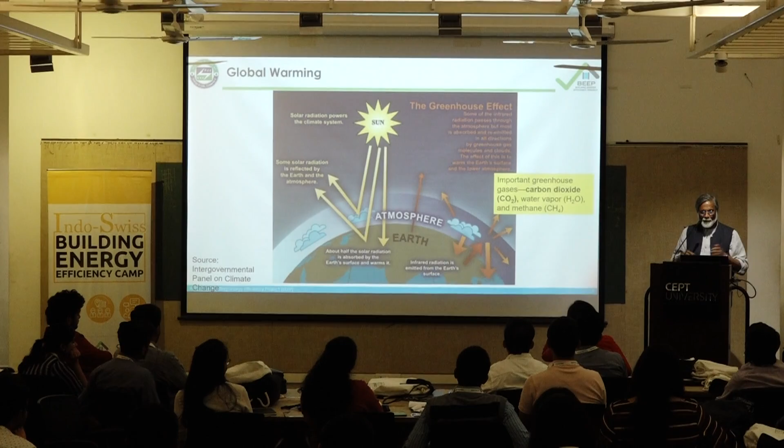Is there anyone here who doesn't know what global warming is? We all know what global warming is, and it's clear enough that it is happening and it's been proven. Is there anyone here who doesn't know what it is being caused by? We all know, right? It has to do with the concentration of carbon dioxide in the atmosphere.

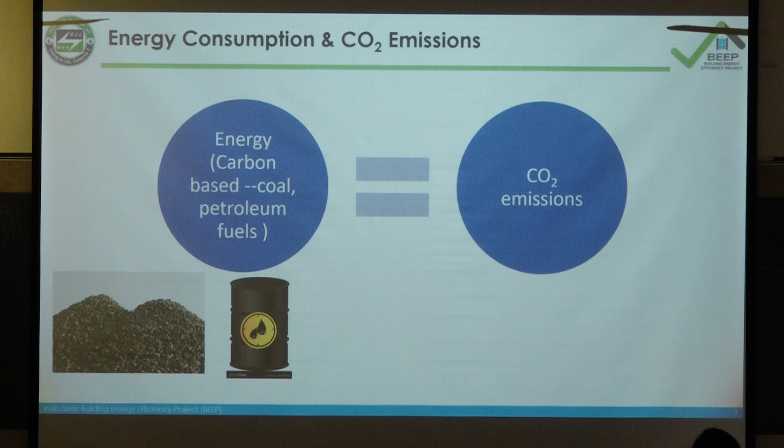Much of that concentration is being caused by carbon-based energy production—coal, petroleum, gas—which releases carbon dioxide, apart from deforestation, which is another cause of carbon dioxide emissions. This is a major thing happening because in our modern day we've become dependent on this carbon-based energy production. We now have to somehow see how we can withdraw from it if we are going to do anything about climate change. That's the big picture.

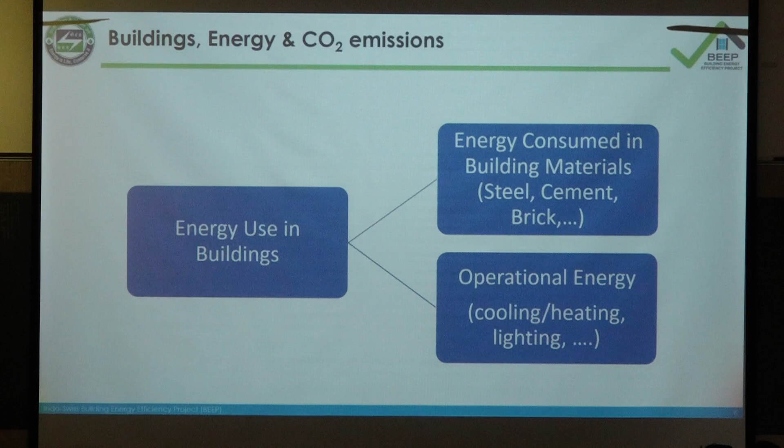And now we know clearly that globally, building operations and production of building materials contribute—what's 28 plus 11, about 39, say 40%—of carbon dioxide emissions, and the responsibility for climate change is directly attributable to buildings. That's why it's so important.

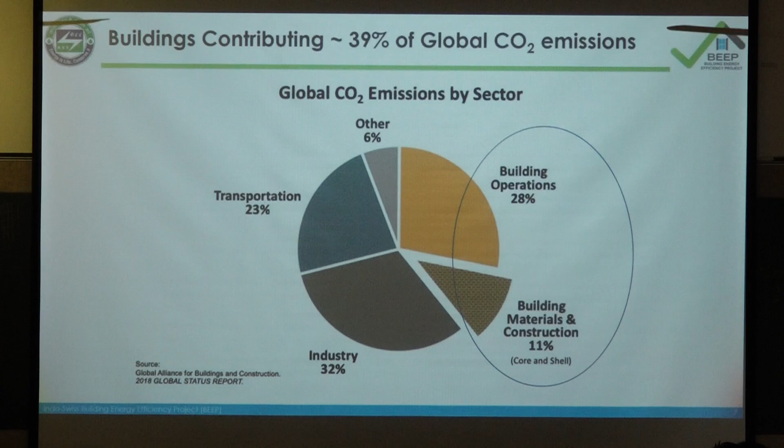And you can see if you add transportation along with cities, etc., the built environment is actually a more complex picture. The way we make cities and live in cities—the buildings and city systems going up and down, managing city space, distributing services, etc.—is going to be responsible for a good 40 to 45% of what's happening.

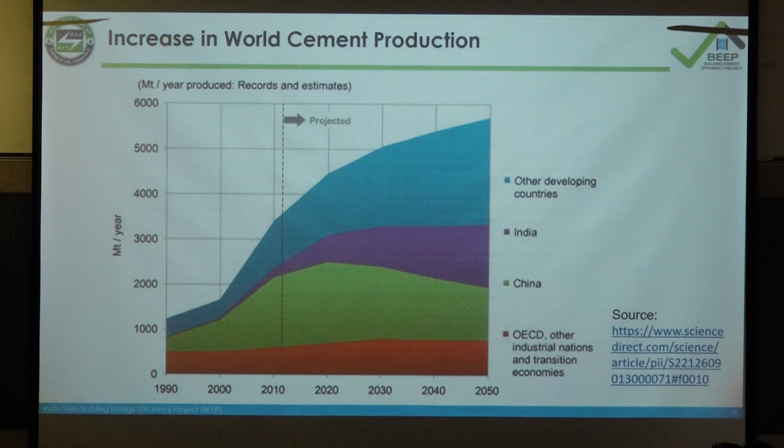But you know, the picture is changing. You go to China, India, Mexico, Nigeria, Brazil—the picture is changing. Societies are developing, populations are growing, and very soon we are going to be the bigger contributors. And that's what we have to watch out for.

And not only that, what's happening is that as we become a little better off, we need more built space per person. As we become better off, I need a restaurant, I need a cinema, I need a college, I need a school, I need this and I need that. So the per capita construction activity also increases.

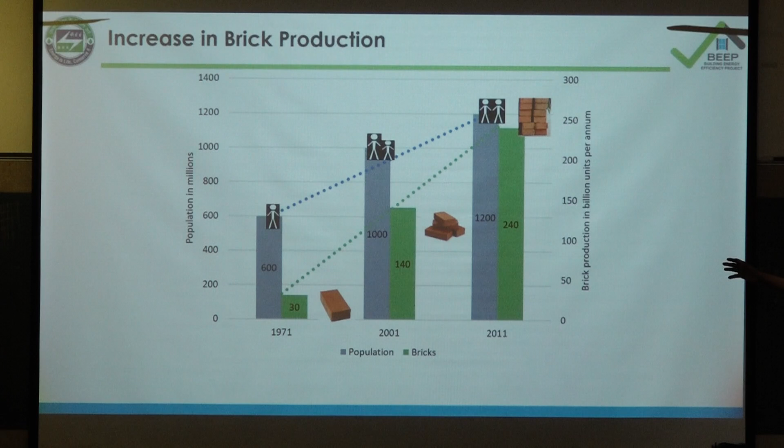And so there's a big increase, not proportionate to population increase. It's population increase multiplied by wealth, leading to much greater building demand, and that has both an impact on operational energy as well as embodied energy.

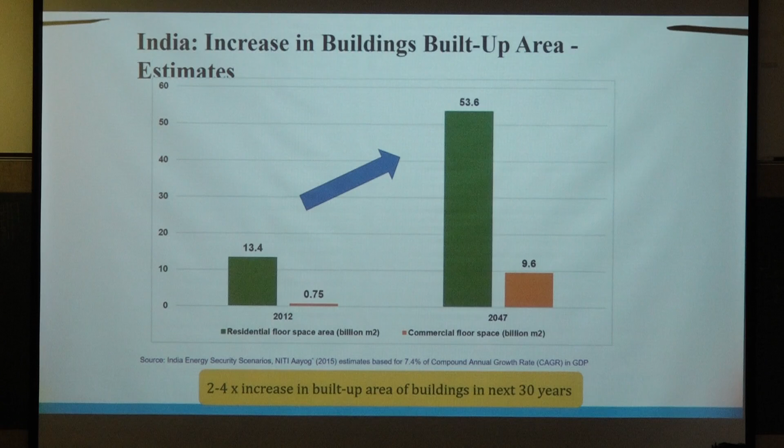Now just imagine another 50% addition of built space in one decade, and the type of building we now build—multi-story, reinforced concrete, steel, glass, plastics, aluminum—the intensity of embodied energy is also increasing per square meter of built space. And that's happening across the country, 63 cities with large populations growing, all in one decade. You know what this is? This is a bomb—a bomb exploding simply on account of increased building activity of a certain kind. That's the story of embodied energy.

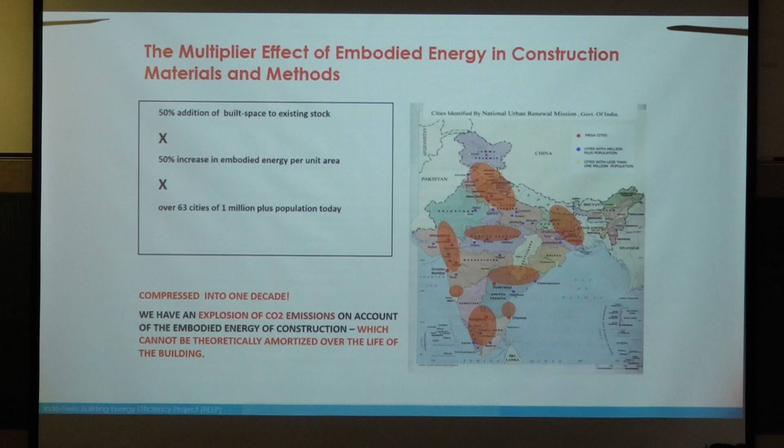And Samir says he's going to pick this subject up briefly, although that's not the core of what we're going to do here, but he's going to pick that subject up.

And here's another piece of information, very important. When you talk of operational energy, there was a time when we thought it's commercial buildings—ECBC. We all know what ECBC is, Energy Conservation Building Code. What is it meant for? For which type of building? Commercial buildings. Why?

They consume a lot of energy. But actually, if you look at the global perspective, it's the residential sector that's consuming more energy, and it's consuming more and more. So consumption of energy in the operation of residential buildings is not growing only in proportion to population, it's also growing as a result of improved incomes.

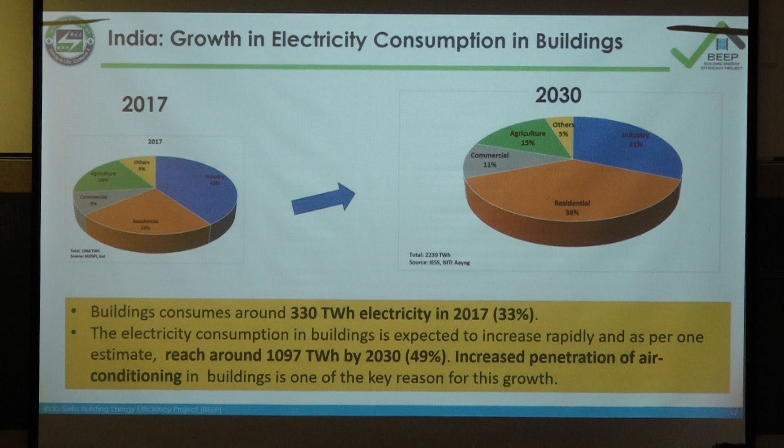That's a big thing coming to us - this story of thermal comfort. I designed buildings for people who just came back from California, working in an IT office. I said, we're designing for 25, 26 degrees centigrade, and you can open the windows when you feel like it. The guy turns around and says, what are you talking about? I can't work if I'm not comfortable.

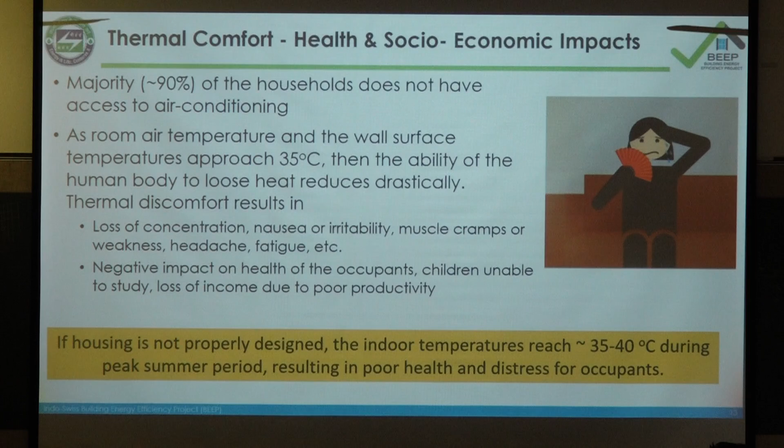Those guys will refuse to work in this hall. They'll say, I can't concentrate, I'm too uncomfortable - give me 21, 22 degrees centigrade. That's what they're asking for. So this demand for what we call air-conditioned comfort is just growing without control, and nobody is questioning it. Nobody. And the air conditioning industry is very happy with it all - some of us are involved in that industry too.

So just watch out, this is important. As we look for air-conditioned comfort even in our homes, everybody is sticking in this indoor unit, and there's an outdoor unit just outside. The moment you feel uncomfortable, you press the button, boom, it starts consuming electricity. What happens to that electricity? It turns into heat outside. You pump the heat from inside to outside, and add the heat consumed as electricity to the outside. What have you done? You've created a hotter outside of the building.

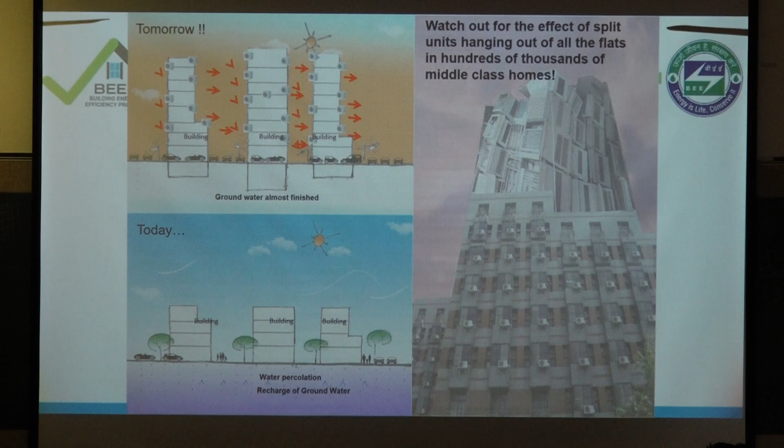When you've created a hotter outside the building, what do you need to do? More air conditioning. And so a vicious cycle is set up. What does it lead to? Quite apart from the changing of surfaces and building mass that produces the urban heat island effect, anthropogenic heat produced by mechanical and electrical devices meant to make buildings more comfortable adds to the urban heat island effect.

So you see now, this thermal comfort business is a crucial business. You really have to control it, bring it under control. And that's what we are going to be focusing on.

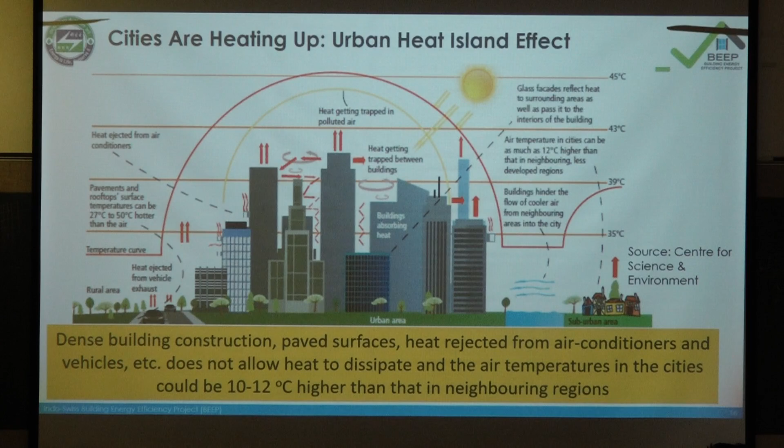So who's driving this? I was talking about the engineers and the air conditioning industry - but who's really driving this trend? The rest of us, the architects. We are driving this trend. So each side is 50% of the culprits.

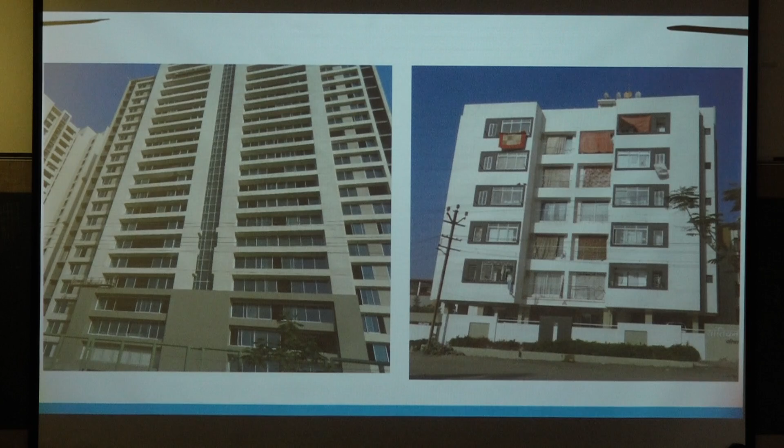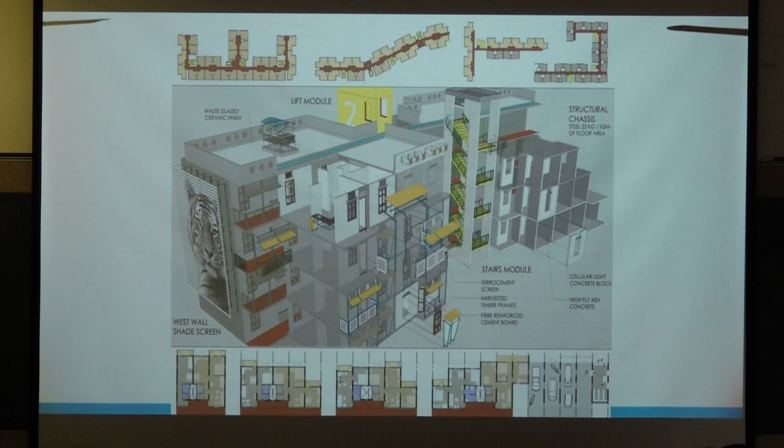Very, very important. And housing, even low-cost housing designed for thermal comfort, is going to be very crucial. Because even if I have a teeny-weeny house, 30 square meters, 40 square meters, to live in today, when I am a little better off, I will ask for better comfort.

If my house is not carefully designed, my air conditioner is going to consume much more electricity. It'll run for much longer and at higher capacities. So people say energy efficiency is about commercial buildings, high-tech buildings, complicated buildings. No, no, no. It's about this one as much as anything else. Simple homes also have to do something with it.

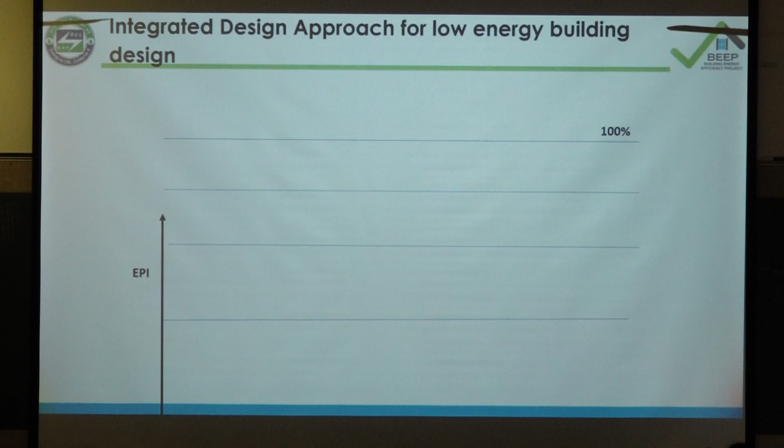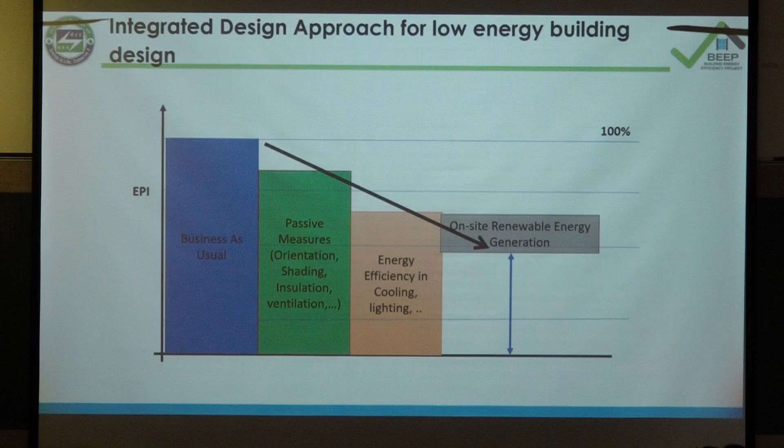And this is claimed by our friends at Green Tech. They say if you get it right, you can potentially drive down carbon dioxide emissions by 40%. In other words, if globally buildings are responsible for 40% of carbon dioxide emissions, it can definitely be brought down substantially. And certainly it can be kept down as we grow as an economy, as we grow as a population. So that is what we are trying to learn, how to do that.

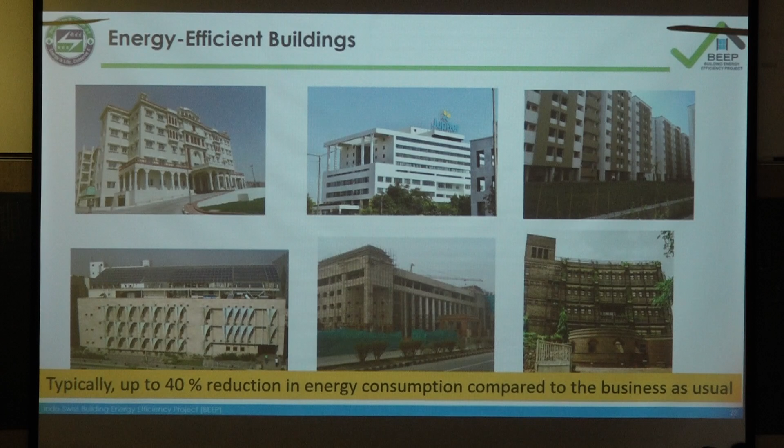And this has been done for many institutional, commercial, and now even residential buildings, as Saraswati just showed, a comparison of her house to the one that's built in Rajkot. And just to repeat what Saraswati said, because it bears repetition, I think this is extremely important.

Climate, comfort, buildings and climate - that's kind of a theoretical framework. What is climate and comfort? Comfort for whom? For the polar bear? For the ant? For the old person? For the young person? For the lady or for the man? For people dressed like this or dressed in another way? Comfort for whom, and in relation to climate.

And how do buildings interact with climate? What is the impact? When you do something like this between the outside and the inside, what happens? What are the principles that determine that? That's something we need to understand more precisely.

Then you begin to say, okay, this thing that we do around us as building has to do with our comfort. And if that is not sufficient, we'll have to add some devices to make it more comfortable, which we call HVAC, or artificial lighting. And then even that mechanical and electrical means that we deploy, we must understand their engineering really well so that even that can be made very efficient. So that's the sort of sequence of things that we are looking at.

And finally, I just want to say this - what we hope to do in this design workshop is to synthesize the creative capabilities of those who configure and assemble buildings for various purposes. Who are these people? What do we call them? They are architects. These people who do this kind of work, we call them architects.

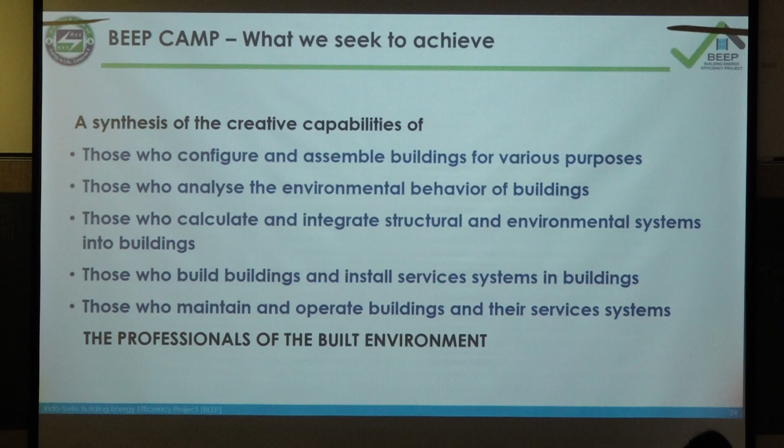And so we are really going to be looking at the first three - the set of architects, building scientists, and engineers - as if they are totally merged. That's our task. And once we learn to work together as a team, feeding on each other's knowledge and capabilities, and informing each other about our field of experience or knowledge, I think we have a much more powerful way of addressing climate change in building energy efficiency. Thank you.